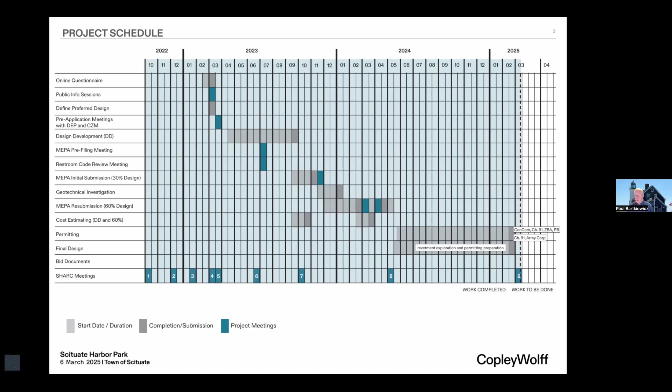Just a question, Madison. Corey mentioned that we'll have to talk with the Corps about the revetment work. Will we talk with the Corps as well on the small boat dock and ramp? We will. Okay.

So again, you've seen this slide before, but just a reminder of where we were and what's changed. We had this 30% design in November, and some of the main comments, although the design was being refined, was about this retaining wall behind the boardwalk and concerns of how water's moving, filling, and how that planted berm works. So we had some concerns about that.

That was removed. Additionally, in February, there were still concerns about how water moves through this planted berm. We had a concrete access walkway from the parking lot, as well as here and here. Since then, those have been removed so that we're making sure the water is moving in the right direction, that it can get through this planted berm if needed during a flooding season, and that there's no water being pushed in other directions. Jim will touch on that later in this presentation.

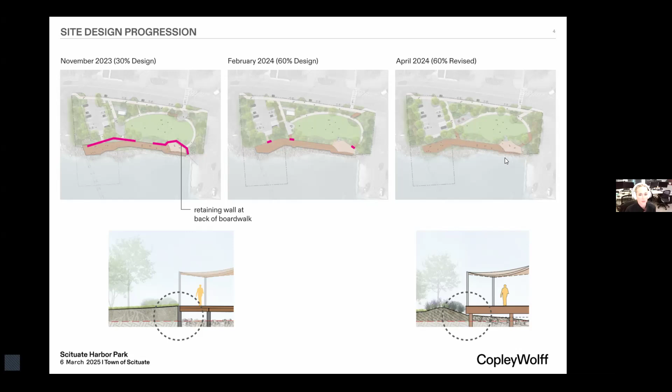Again, a reminder, this was the 30% design. Just as a flag, this is a little legend - magenta means something was commented on as a concern, and blue means it was addressed. So in the 30% design, there were concerns about this retaining wall here, and how that fill and the water is going to be moved.

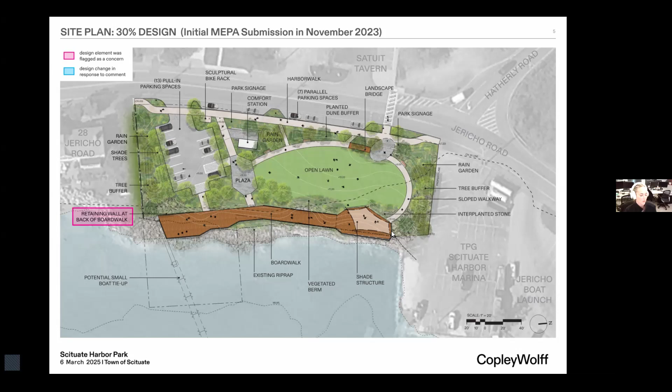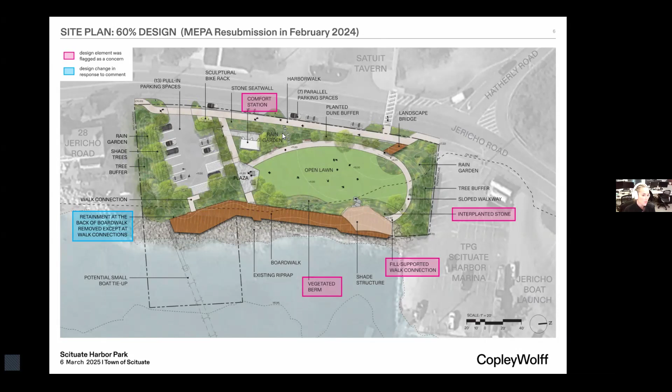Then we got to the 60% design, which was the MEPA resubmission in February, about a year ago. As you can see, we were making some tweaks, but there were more comments about these little fingers of concrete here filling near the revetment, and how that works with the vegetated berm. There were concerns about the interplanted stone between the plantings, and additionally the comfort station was of concern. So those were all addressed.

And here is the plan from last May that you guys most recently saw. You can see this boardwalk and these fingers are now all wood elevated, so water can do what it needs to do. We got rid of the stone in these interplanted areas, extended the boardwalk, and got rid of the comfort station. As Christine presented last May, we're now considering something similar to this portable restroom, which would be located somewhere in this parking lot.

And then, as Paul mentioned, there was a long conversation last meeting about the potential small boat tie-up, which has now been corrected - it is a boat tie-up that has been part of the zoning, planning board, and Chapter 91 application. So that is all in our basis design.

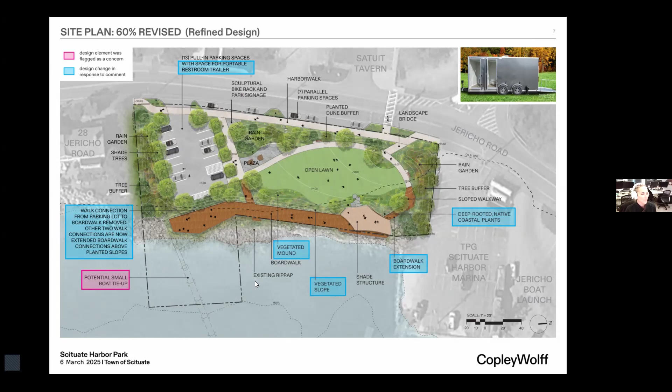One of the big changes was actually moving the plaza from the last iteration out of the planting bed into toward the rain garden area. So that's a good move, and it was reduced also. The previous one had the plaza moved out of the planting bed, moved in toward the rain garden, but we reduced it even more because we understand that most people are coming here to go onto the boardwalk and get into the shade structure and enjoy the view, not necessarily hang out on a plaza.

So that could possibly even be reduced some more. So the intent is that the lawn is that social spot. It is for the community. It is a sort of a pause point between downtown Scituate and for the people who do the walk out to the lighthouse.

I pointed out to the Conservation Commission, for the parking area, that there was one concern from a neighbor about parking on Jericho Road. So we actually pointed out that the parking shown along Jericho Road is actually where the existing sidewalk is now - so we're not reducing the road at all. The sidewalk actually steps into the site.

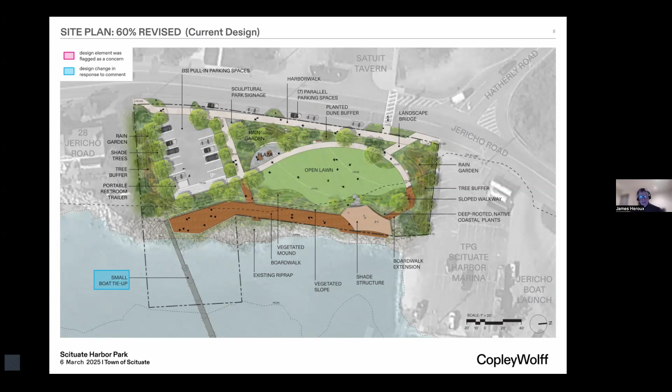It's basically repeating that those two flanking rain gardens on the north and south end of the park are actually reduced in grade. So as the water runs off the site, it's collected there and then it outfalls back into the harbor itself. You can go to the next one - the next one, actually, yeah.

So the program, as you can see from 2023, there was the comfort station.

There was that plaza sort of getting close to the community boardwalk. Madison already brought up the walls, which was a concern because it was diverting water off to the sides. Comments came in from environmental reviewers that it'd be best if the water flowed through the site similar to what it does today, rather than hitting an obstruction, picking up velocity, and going to the left and right.

So you can see where that plaza moved toward the rain garden. The comfort station became more of a portable bathroom, which actually can be detached if a significant weather event is coming through. It can be removed from the site completely, then brought back and hooked up again.

You can see the small boat tie-up, and when we say boat, we're talking kayaks and canoes. Maybe someone drags their Sunfish down there. It's not meant for motorboats. The comfort station is now more of just a portable bathroom.

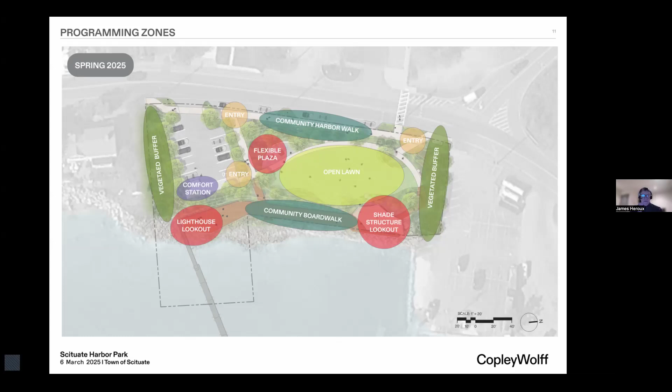Again, flexible in that parking lot, and the flexible plaza. It's flexible because as we develop the plan, toward the final, it might be just a very small paved area for picnic tables and that kind of thing. It's really meant to focus on boardwalk and lawn.

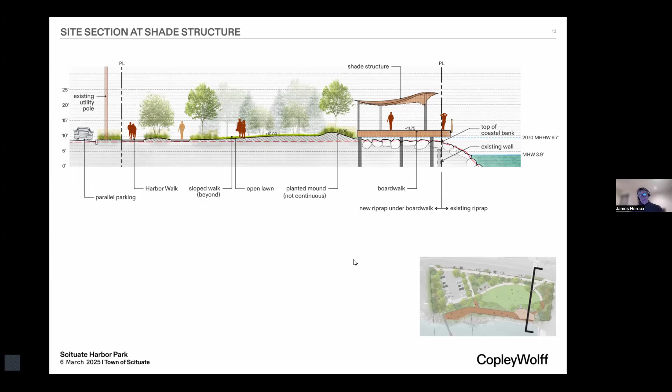These sections actually show the existing grade, shown basically in red. The site is being raised slightly, but because there are no obstructions as the water flows through the site, it comes underneath the boardwalk, underneath those connections of the land to the boardwalk, and continues across the site toward Jericho Road, pretty much as it does today. As we go through other sections, it's going to repeat that — the water flows through the site underneath any built structure.

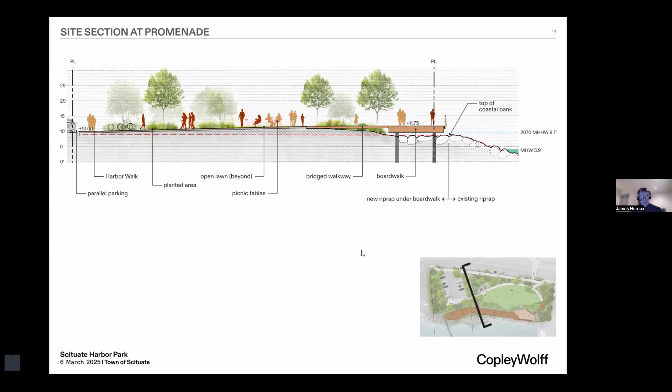Same here, you can see that boardwalk that Madison mentioned, getting out the bridge walkway to the boardwalk.

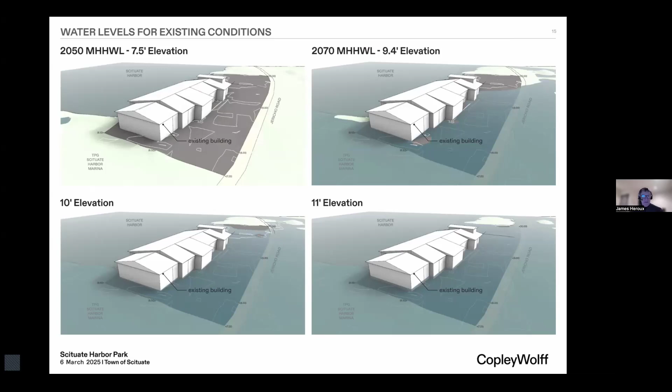We can come back to this if people have questions, but this is showing the mean high water mark at different elevations as it comes through the site — existing conditions, what it does today, what's projected, and then with the park in place. So the change isn't really significant at all. The water's still going to flow through the site, still get to Jericho Road, and then recede back toward the harbor.

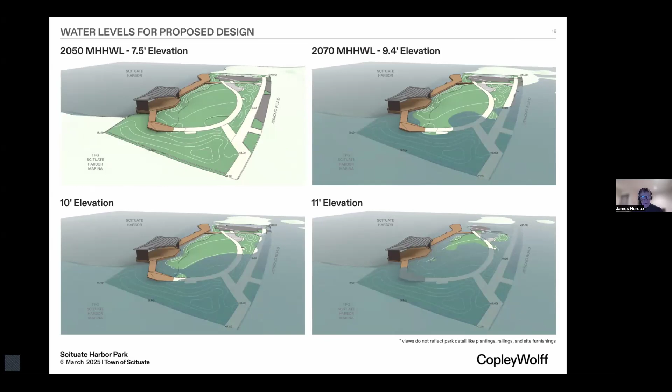I think the next one begins to show the direction of the flow. It basically illustrates that as the water comes through the site, it's directed into those edge rain gardens, and there's a culvert that collects water and empties it back out into the harbor.

There was some concern by one of the neighbors that water is being directed toward their site. But that rain garden to the south is actually going to be excavated down about 3.5 feet, so it becomes a much lower point than what exists on site today. Of course, on site today it's pavement edge to edge. With that 20 to 40 foot wide vegetative buffer reduced in height, it will collect the water and drain back out toward Scituate Harbor.

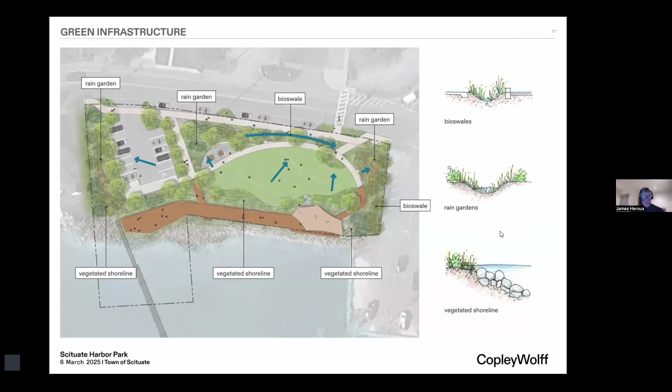We got a lot of applause from the Conservation Commission on the indigenous planting. So we are using indigenous planting, which once established can be very, very low maintenance — it's what you'd expect to find in Scituate or anywhere along the coast.

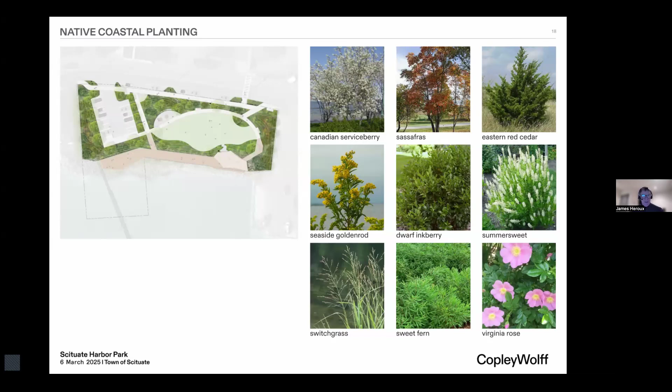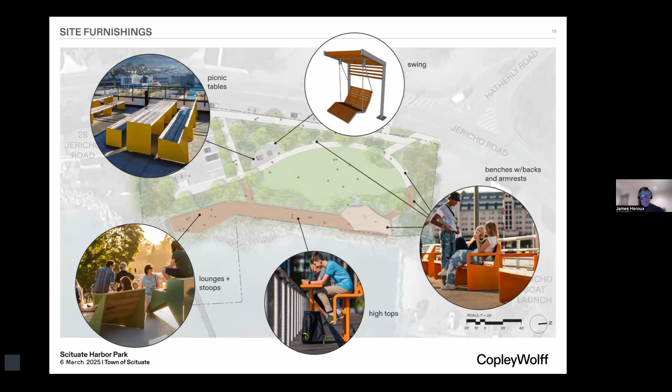When it comes to site furnishings, we haven't picked any final site furnishings, but these were just some examples of very durable materials that could possibly be used — that's a little further down the road. The idea is that the boardwalk itself would have possible permanent swings and seating, so people can gather there, look at the lighthouse, and meet friends along the pause point from downtown to the lighthouse.

And of course, when it comes to providing continuity to the town, it's really just about trying to recycle materials — maybe we can recycle the blocks that were removed from the lighthouse. Certainly any additional sculpture we put in there would be consistent with the character of the town, recalling the history and connections of the Irish moss and your sister cities around the world.

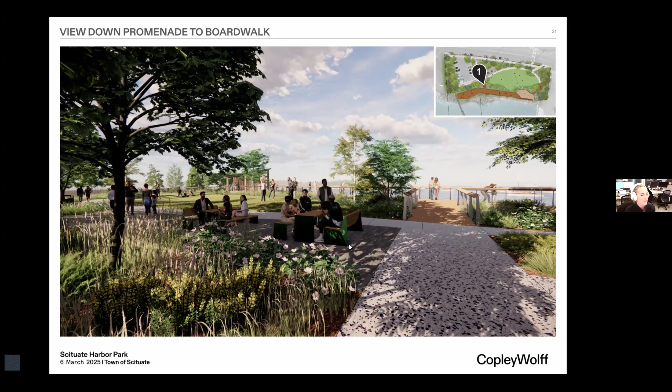Yeah, and you guys have seen this before, but just a reminder visual for you. We're standing at that finger over here that has become a boardwalk now. To your right is the parking lot. Admittedly, this has been closed off in the plan, so this is all planting now. This plaza area actually has a bit more buffer to it, but you still have really awesome views of the harbor in the background, and hopefully it's as fun as it looks in this 3D model.

And then here's the other view that you've seen before. Right under us here is one of those rain gardens that is intended to capture water. This one would really be the one that intercepts some of the flow going to Jericho Road, so hopefully that helps mitigate that a little bit. But again, as you can see coming down from Hatherly Road, beautiful view of the harbor.

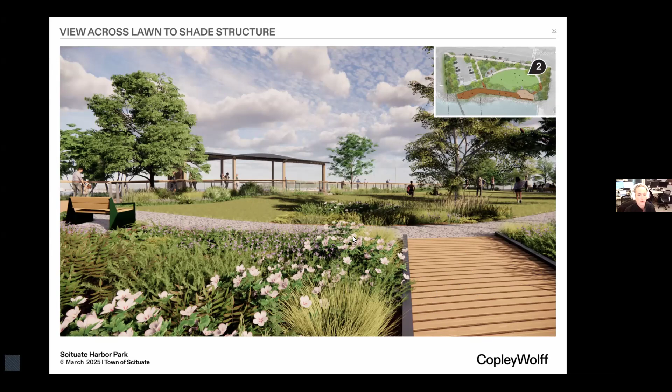And that's it. Again, it was the same presentation as basically last May, with a lot of schedule updates for us. And also, stay tuned, as we'll be reaching out to you guys this summer to coordinate some of the things you're interested in, and to understand priorities. We're happy to go back to any of the slides if you've forgotten things from last year, or want us to elaborate further on any details.

Hey Jim, I just wanted to add a couple points. Thank you to you and Madison for that update. On the parking, we did review the parking plan with, I think it's called the Traffic and Safety Commission, and they gave us a letter of approval. We did that last year, I believe. That was good. And then we presented to the select board for consideration.

If you keep that image on the screen, you can see the marina to the right and a green area between the road and the parking. We presented for consideration by the select board putting parallel parking where that green area is, so it wouldn't reduce the road, and the sidewalk would be relocated. We could pick up, I think, 11 or 12 additional spaces without compromising developing a park instead of a parking lot. And while the select board didn't formally vote, the reception was very positive. So that's more potential parking.